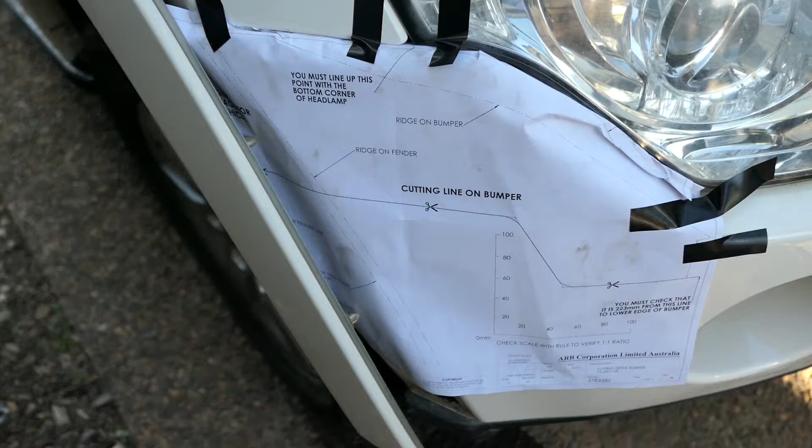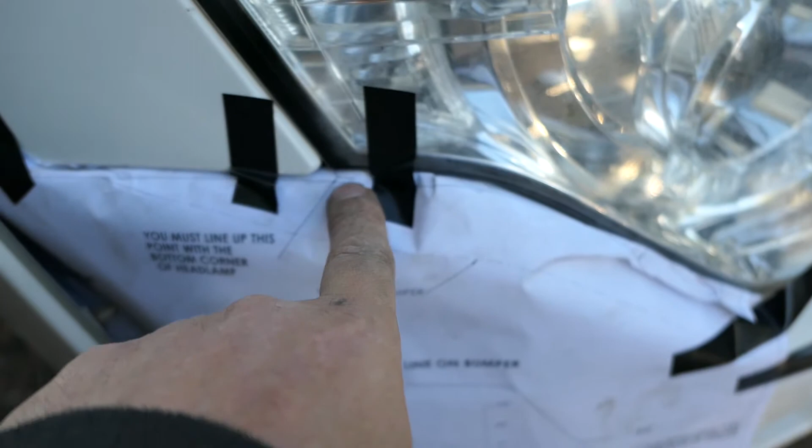Okay, so here we are with the templates stuck to the vehicle, and it does help if you've got these fenders still off so you can stick it on. Get yourself heaps of sticky tape. The best point of reference that I found was this corner point here that lines up with the corner of the light assembly.

But you'll run your finger along and see that's the edge of the bumper coming out there. They are fairly square, I believe, but I don't know if I can tell you that's exact. A bit disappointed with ARB here.

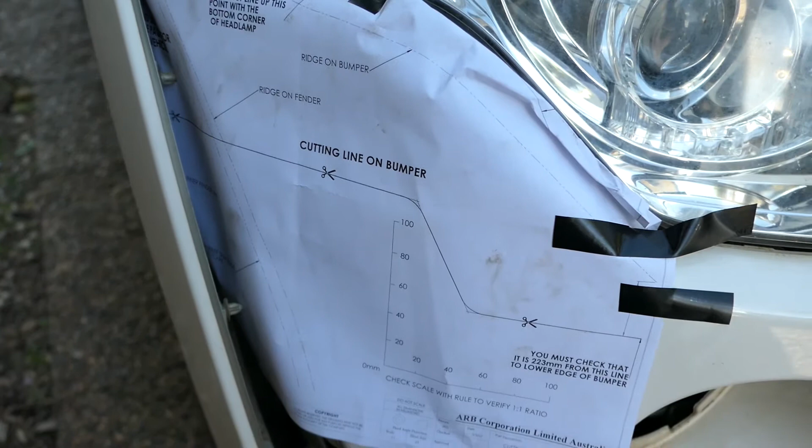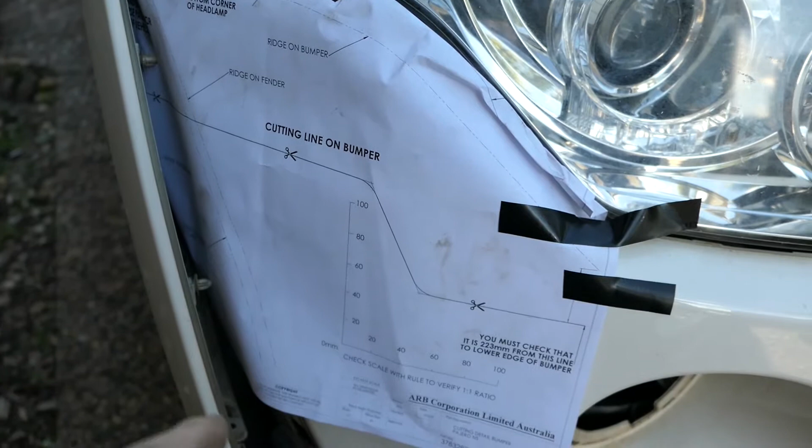They only give you one copy of this template. It's A3 size paper, so take it and make yourself a few copies. You are going to need it, you might tear a few. I haven't done that yet, but I've got about half a dozen copies as backups, and you're certainly going to need two anyway, one for each side.

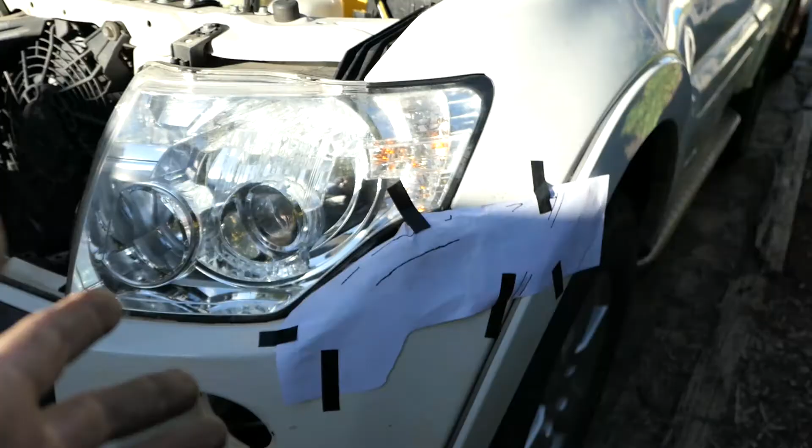Disappointing that they don't supply one template for this side and one for the passenger side. What you actually get is the template for the right hand side, the driver's side. You need to turn that, flip it over, and use it for the passenger side.

Obviously you can't see through paper, so what I did was get some black marking texta and just mark this up so I could see the points I needed to see through there, then stuck it on.

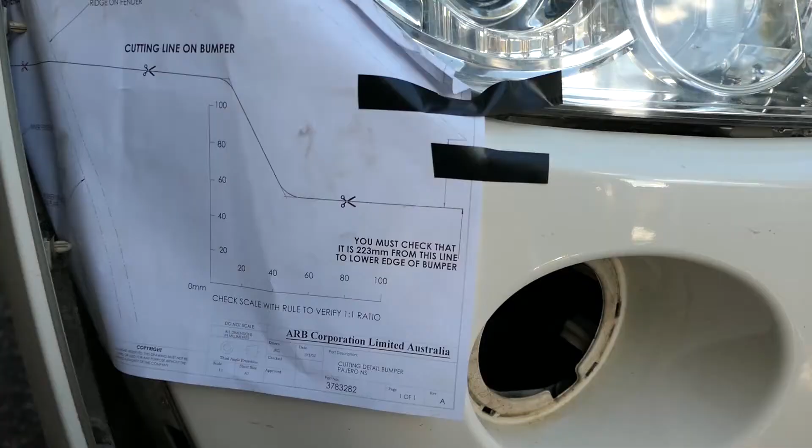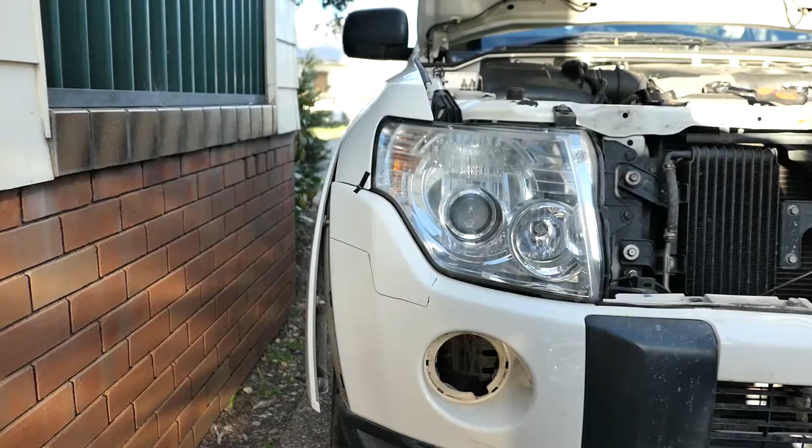So what we need to do now is go ahead, get the black texta, and mark along those lines. There's a line there which says the bottom of the bumper here has to be 223mm from that point. Keep in mind I'm doing this one-handed, but I've got both of those sides at the 223mm.

Okay, so that's both of our lines marked up. Now on the instruction sheet it just uses masking tape, so you can mark up some masking tape.

I'm happy enough to mark the panel work there and remove that once the job is done. I'm pretty happy that both of those look fairly even. When I stand at the front and have a look, they look pretty close to me.

I've taken some quick measurements and they look reasonably close. Once you fix the indicators to the bar, those tabs really don't hold anything. There's a little bit of plastic coming through, grabbing hold of that tab.

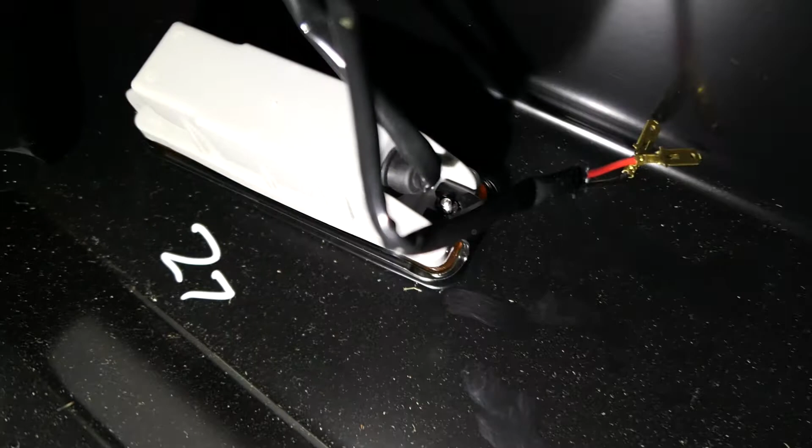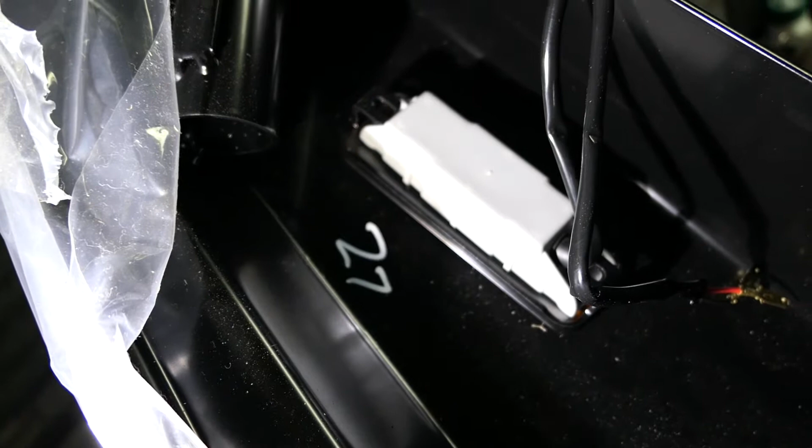This one's not much better, but probably a slight improvement on the other side. If I just balance it like that, you see these just... look at that. That is a shit design. You have to do something with that, but I'm not impressed with it at all. Hopefully you can hear that in my voice.

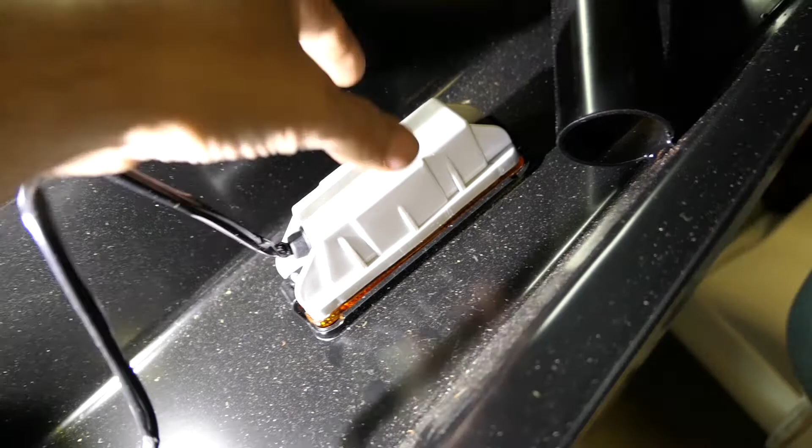Not impressed at all. This is the first one I fitted. You can see there's movement in that, and this is meant to be for four-wheel driving, like a bullbar, so it's meant to be rugged. Why these weren't fitted before you get the bar, I don't know, and why they have such a shit mechanism for attaching these to the bar itself is absolutely beyond me.

This is the new one with the new tabs, so I've swapped them around, and as you can see, that is rigid. That's moving the whole bar there.

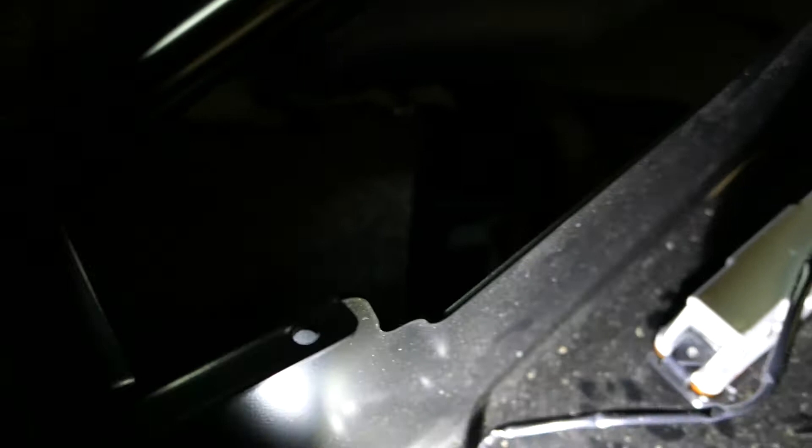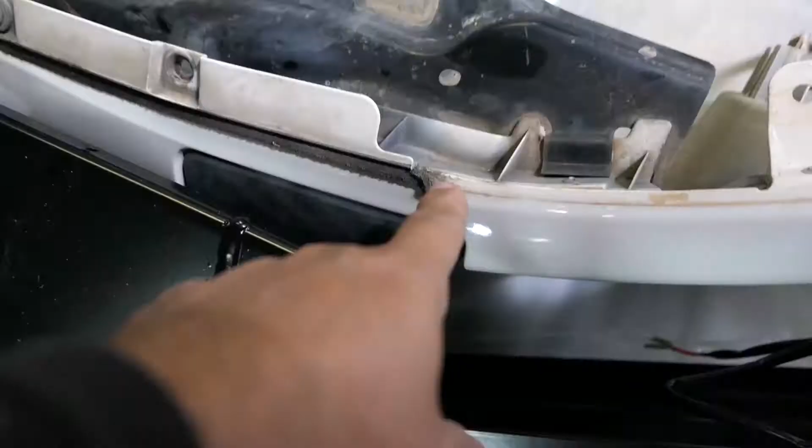Where the other one has now fallen out while I've been working on this one, I'd say don't follow the instructions, go arse about: flip those tabs, put them in through the back, hold the lens on, then screw through the front. That seems to be a lot more solid. It's going to be a pain in the backside to get them out, but at least they're not going to fall out.

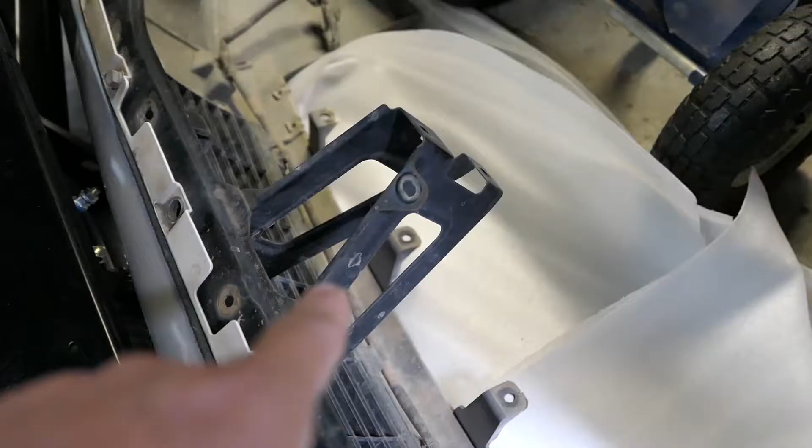But for now, the next step is to pull off this mounting bracket which held the bumper to the top section of the car. You can see that's the main bracket in the middle where we took the bolts out originally. There are just a couple of bolts in this, because we need to cut a section of this out, and then reuse this section later on to remount this piece of the bumper.

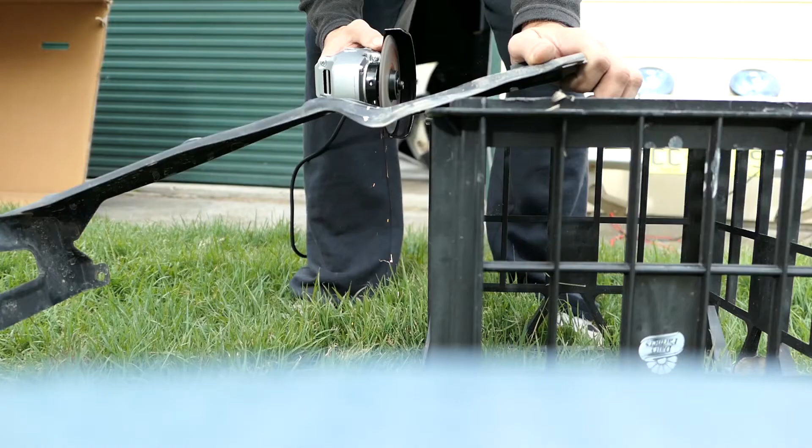We're just about ready to cut the bumper, and I want to do a test cut with the angle grinder because I'm not sure whether I'm going to use this or the jigsaw. So I'm going to go to the centre of the bumper and just give it a quick cut to see what it looks like.

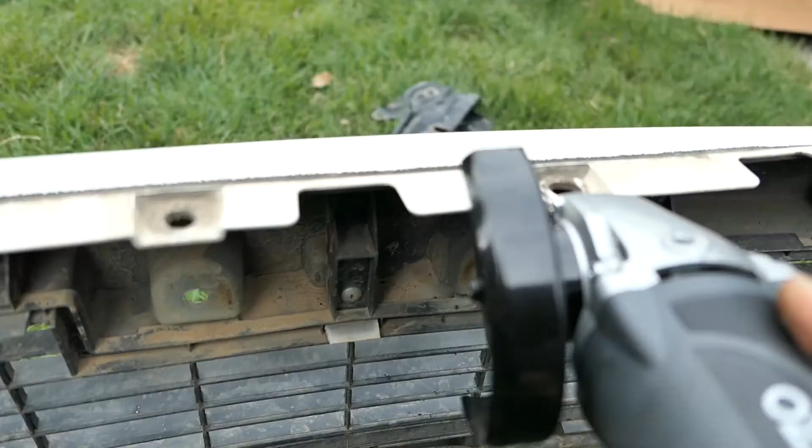That seems to work reasonably well for straight cuts, keeping in mind we've got to do an angle. So I'm going to grab the jigsaw and see what that looks like and how well it handles the material.

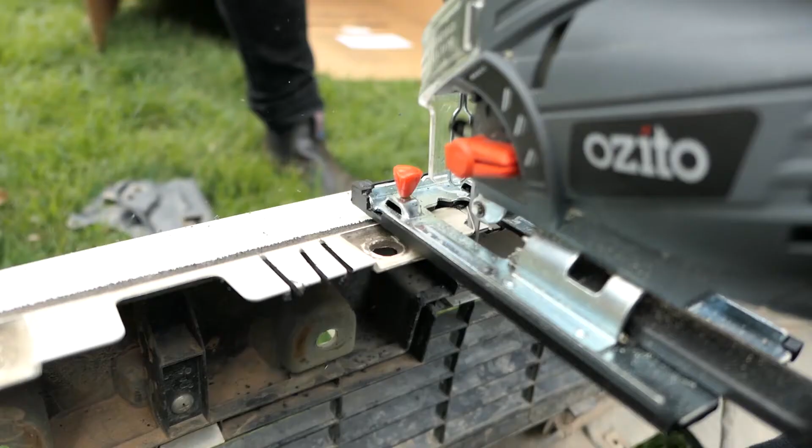What do you think about that, Stephen? Yeah, I'd go that way. Better cuts, definitely tidier, isn't it? So this is the jigsaw and this is the grinder, and I think we have a winner. Certainly a finer cut, and I'm going to be able to turn that as well. Jigsaw it is.

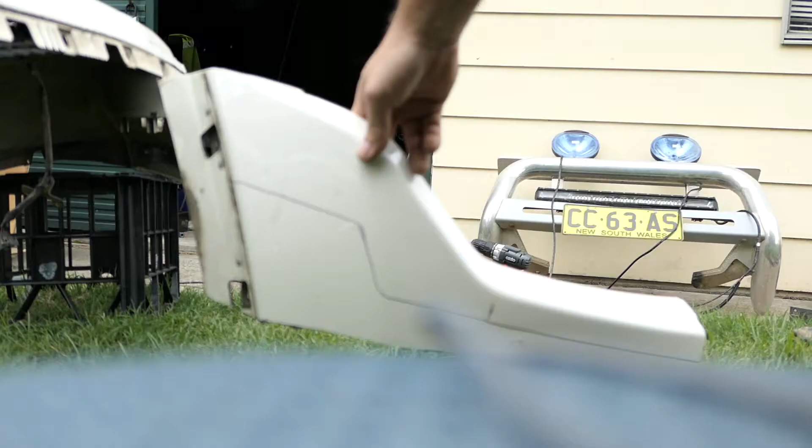So that's roughly what it looks like. We'll see what happens, I'll cut the other side too, eh? Well, I was going to ask you, do you want to wreck both sides? I want to have a matched pair.

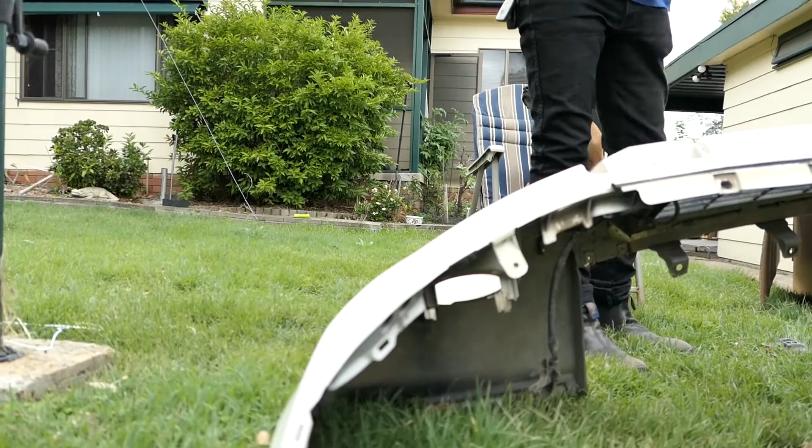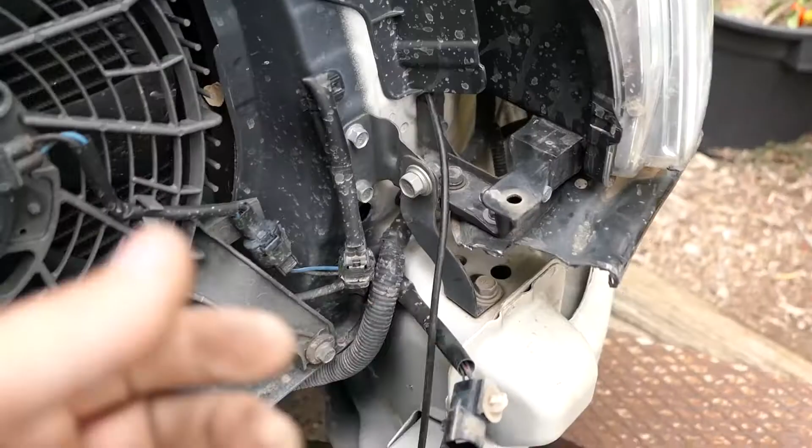So what we've done is just refit - what do they call these, Stephen? Metal bits, okay - we've refit these metal bits back here that were originally holding onto the bumper. This was the whole bracket that went right across the front here, which you've cut down, so they get fit back on.

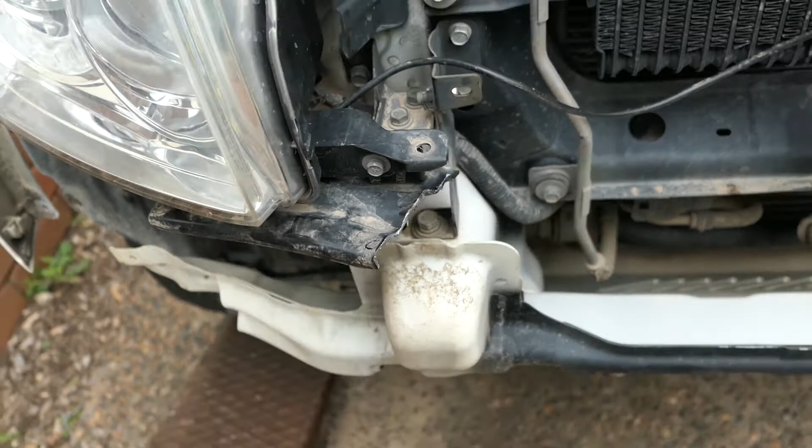Now what we're going to do is grab our cut sections of bumper. I'm still in tears with that one, and we're going to fit that there like that. As you can see, I've actually cut a lot less than I needed, left myself quite a bit of space there. I'm going to refit this, see what it looks like, maybe grab the bull bar, put it up, and see how much we actually have to cut away.

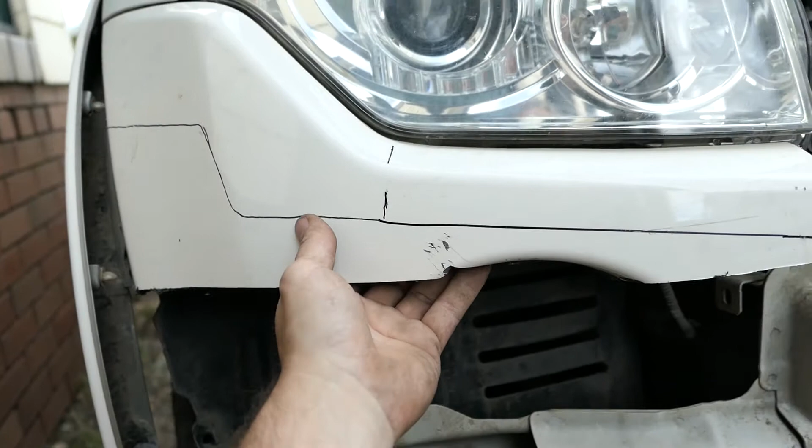We're back to just fitting these parts of the cut down bumper back on the front of the car here. One part, you've got to clip this into the white clips up on this side. You'll clip this part of the bumper into this bracket here, leave this loose so you can adjust it, and that'll make it easier to get a good fit.

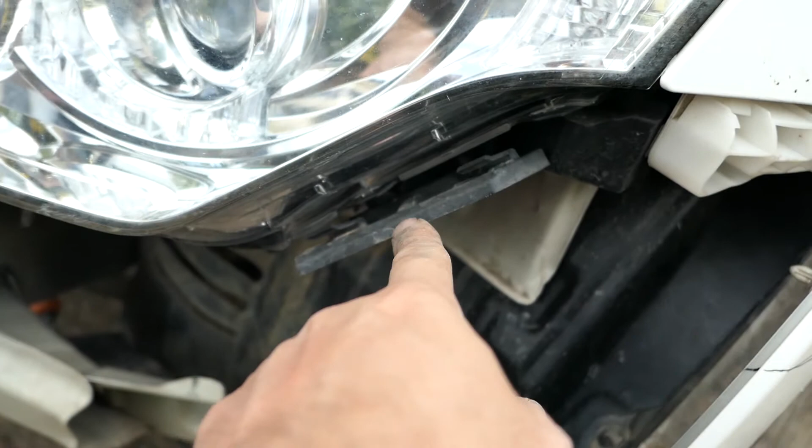But what I did miss is just near the light here, there's like a locating lug, or a support, for that part of the bumper. Make sure that part of the bumper is on top of that, not under it, which is where I was trying to sit it, and it just wasn't fitting up flush against the light.

So get your mount here, these plastic tabs, which are absolutely ridiculous, stupidest thing ever. I'm going to be up for a new one on this side. On top of this piece of plastic here, this location tab, and then the final piece of that tab just fits in here. Again, keep these a little bit loose.

I've tightened that one up. Keep these loose so you can move it around and get a good fit.

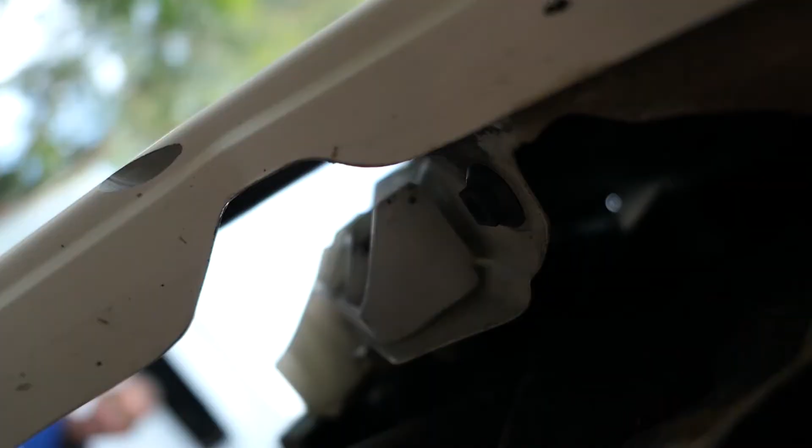Now also, before you try and fit those cut pieces of bumper, come in here and pop out this screw plug, which is just up inside the fender here, and then you can reseat that once you've actually got the bumper fit back on.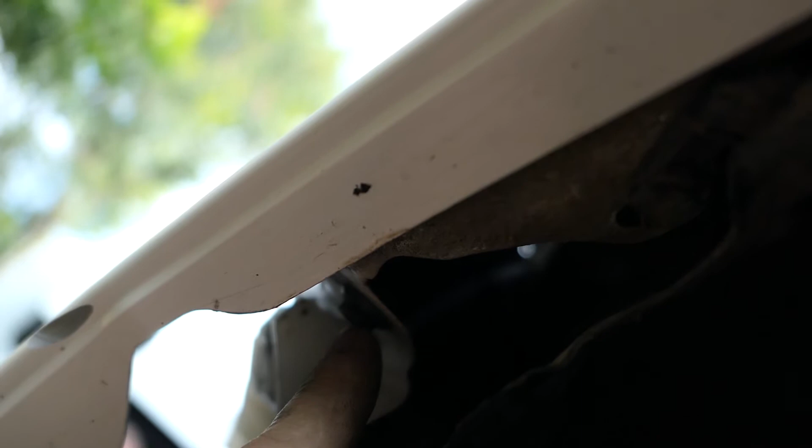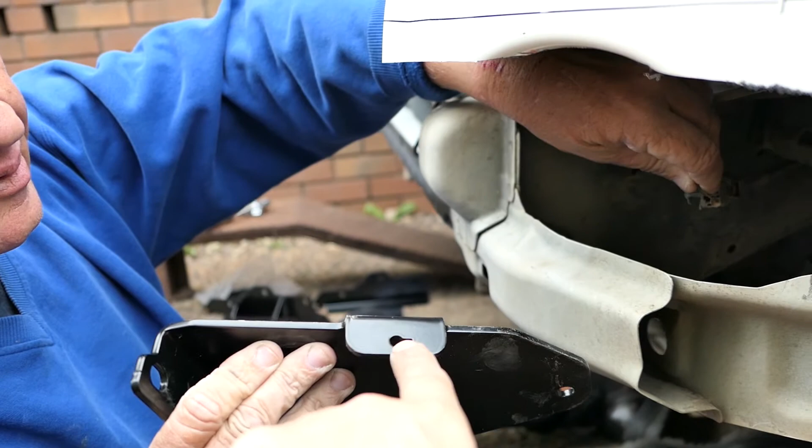When you're going to fit these front mounting brackets, what Stephen has just found is there's a wire running down there, and that needs to unclip, and it looks like that's going to go possibly into the top of this bracket here, I think, under the metal supports for the inner wheel guard.

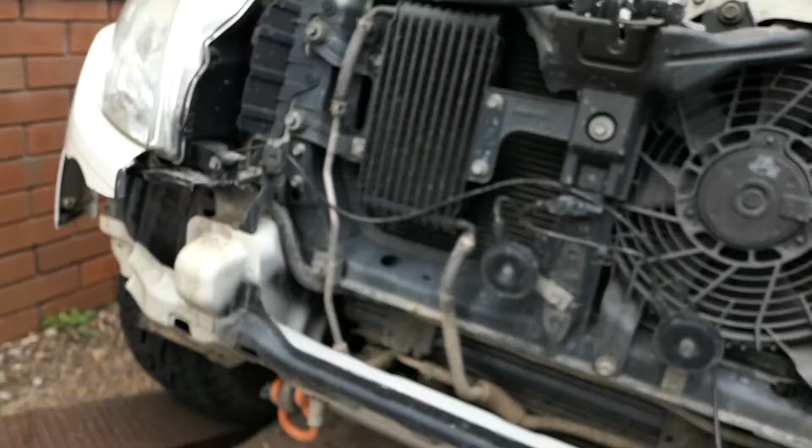Yeah, that would. There's a couple of bolts there. I'll show you on this side because they're still mounted. Just here, this is the support for the wheel arch, I suppose, the plastic wheel arch. You're a good helper.

So there's Titan getting involved as always. So just undo the bolt here, bolt there, they're 10 mils. A couple of scrivets in the back of this, another scrivet in there.

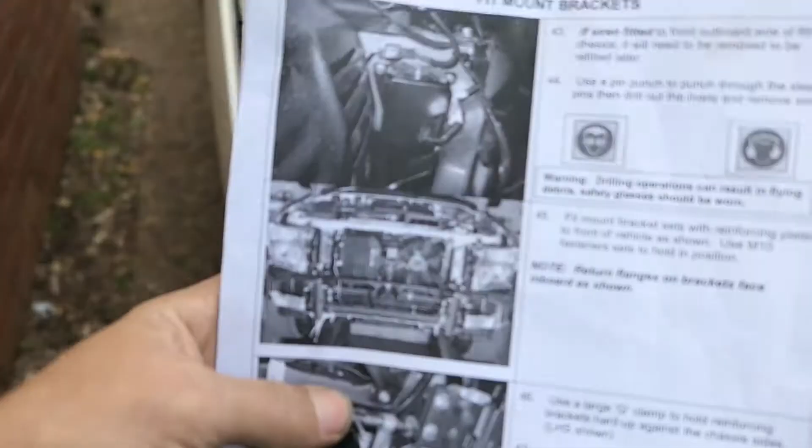And then you'll also see there's that headlight wire running down here, which will need to be unclipped, and then we can have a look at getting these brackets mounted up. Unfortunately, all they do is just tell you to mount the brackets as per the picture, and you can't tell shit from that picture, but we have nutted it out and we think we're onto something.

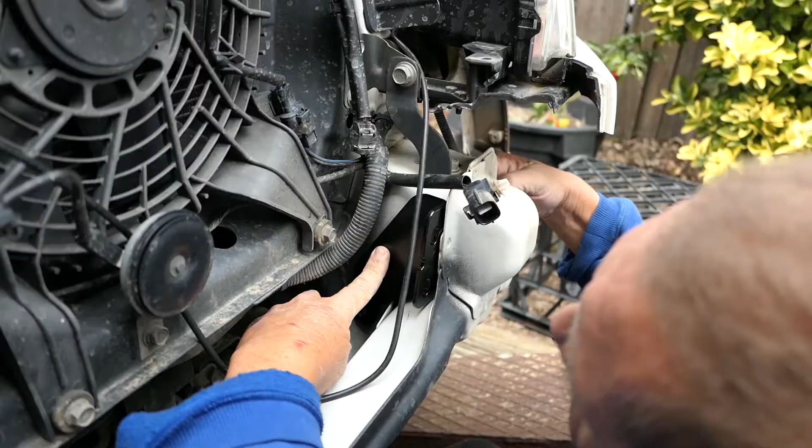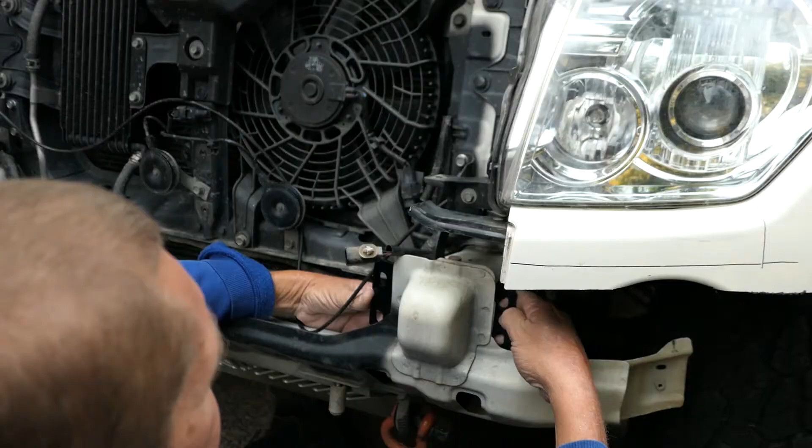To drill into that side piece, somewhere there - so that's the smaller bracket on the inboard side, and then that large bracket on the outboard side, and roughly what they're going to look like. And these big buggers here are going to sit over the front there like that.

Tighten. Okay, so we've drilled our hole on the inside, hopefully you can see that there.

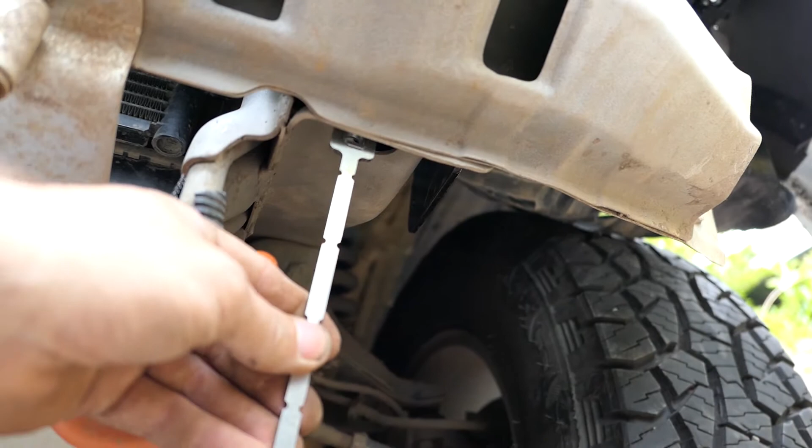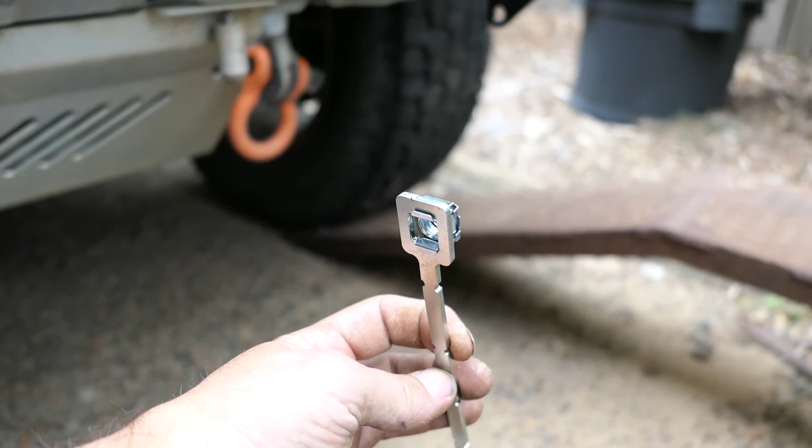And there's our hole. Now what we're going to do is go underneath, and there is a hole at the bottom of the chassis there. Slip that in, just like that. You grab one of these things, you clip one of these cage nuts in, reach up, feed it up to the other side of where that bolt is, then push the bolt through into that nut, and you just bend this into place as per the instructions.

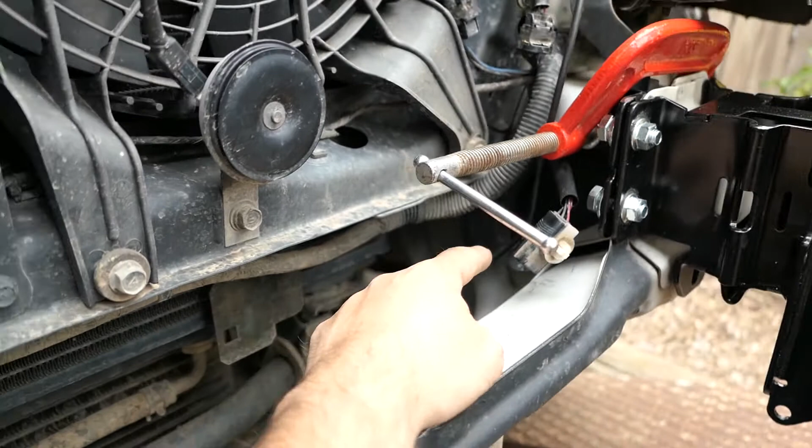So for drilling this side, I've got this clamp here, not sure what size it is, probably about 20 centimetres or something, I suppose. They do say you need a large G-clamp. Get a bigger one, definitely get a bigger one. This was only basically a bee's dick in it to get this to fit.

So what I was finding was once I was tightening these bolts up, these bracing pieces were pulling away from the chassis, so not ideal. So we've got that one drilled in, got that stupid arm thing pushed up through the bottom of the chassis, and the bolt done. Took some effort.

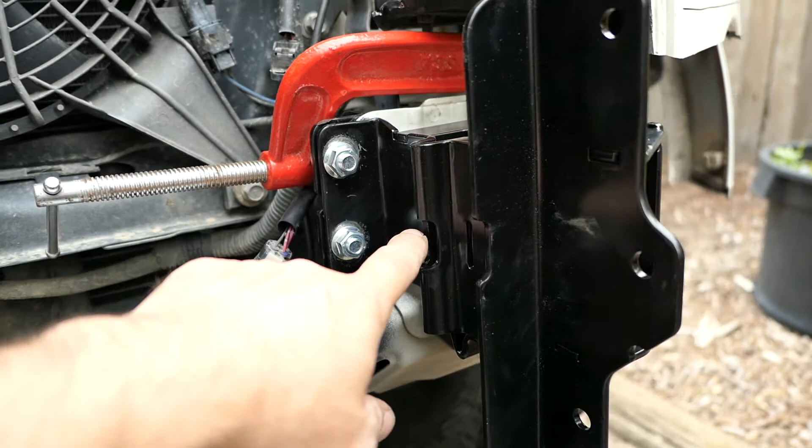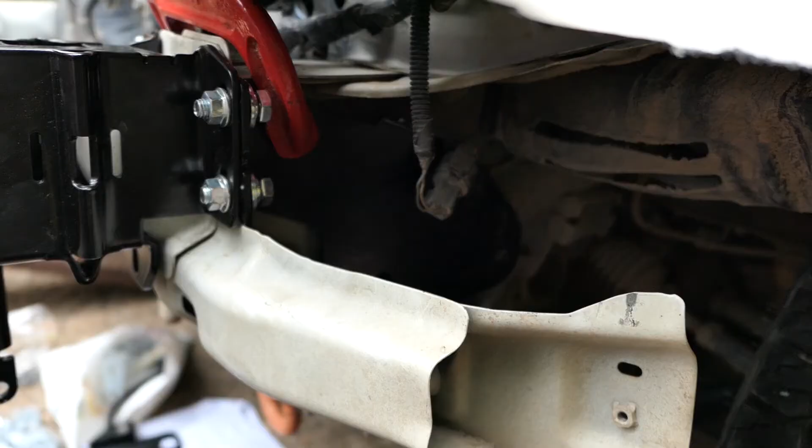Anyway, so this is actually starting to look like something. I don't think we're too far away. I'll swap this G-clamp onto the other side and try and pull that in. Of course, you can see from this side, hopefully - it's a bit dark in there - but this has got plenty of room for me to slide a finger in between that plate and that chassis, so I need to pull that in before I start drilling holes.

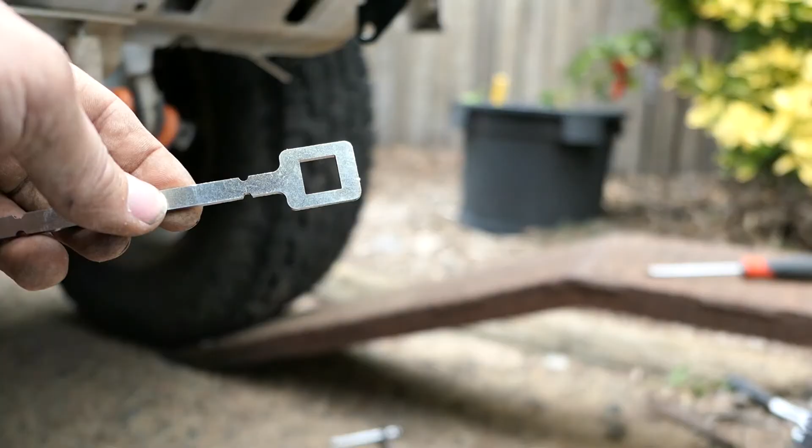So once you've drilled all your holes and you need to get these cage nuts up into the bottom of the chassis, you use these access arms. There you go, access arms to locate these captive nuts up in the back.

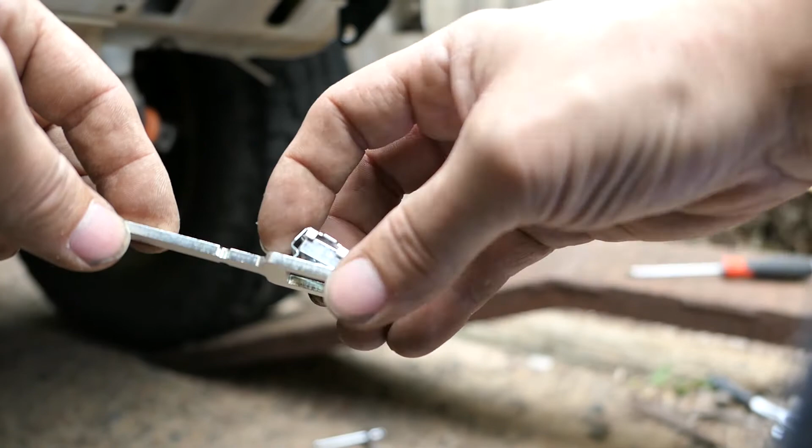What Steve actually pointed out to me was in the earlier one I had it like that and I was trying to mount it onto the bolt coming in from this side, and what he suggested was turn it round, and that actually puts this nut up against the hole and makes it easier to access. So bend your arm in whichever way you need to do it. You can see these are real easy to bend, then you reach up through the bottom of the hole, hold it on the other side of where you've drilled your hole, and you're good to go.

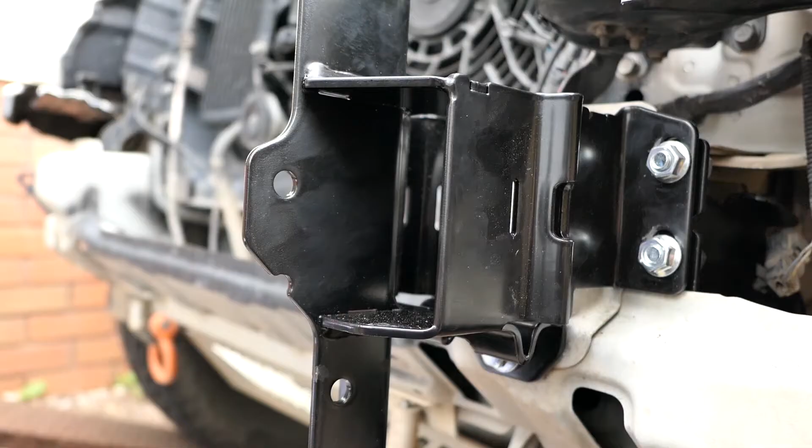Just so you know, this bolt here is just going to use a normal nut, and you can actually just reach through this hole here, hold up on the back and tighten that up. Originally I did do that with a captive nut, but then Steve counted the amount of captive nuts we actually had available, and we quickly discovered we didn't have enough to do the whole lot.

Hello buddy. So captive nuts only for inside here and on the inside there as well. This one here, just a regular nut on the back because you can reach that from here. One of the challenges here is this rear bolt that goes in here.

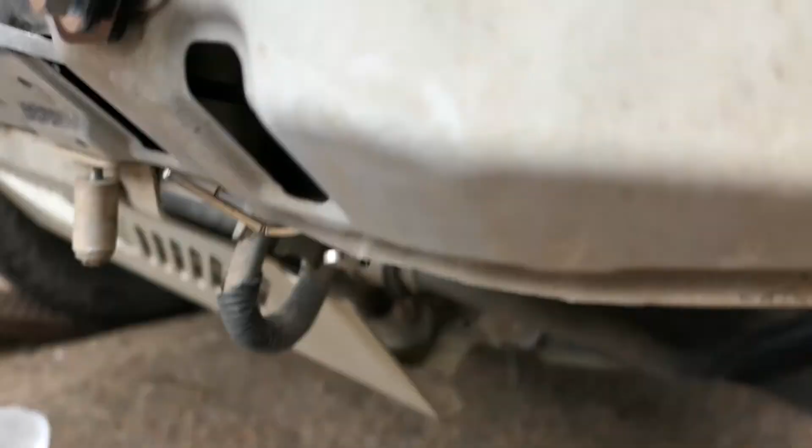Unfortunately, you're using these locator arms that you see here going in through the bottom, and we've only got this little hole to work with - just this little bastard hole here. Once you get a couple in, because we've done the front ones, we've done the left side, we've done the right side, once you get these in, it gets real tight, which means it's real hard to get the third one up and in. You can see I've barely got room for a finger there.

We're sitting here scratching our heads at the moment, thinking about lunch, because I really, right now, have no idea how to get from that point there down to that point there and get that to actually match up. So once I figure it out, happy to show you, but got to figure it out first.